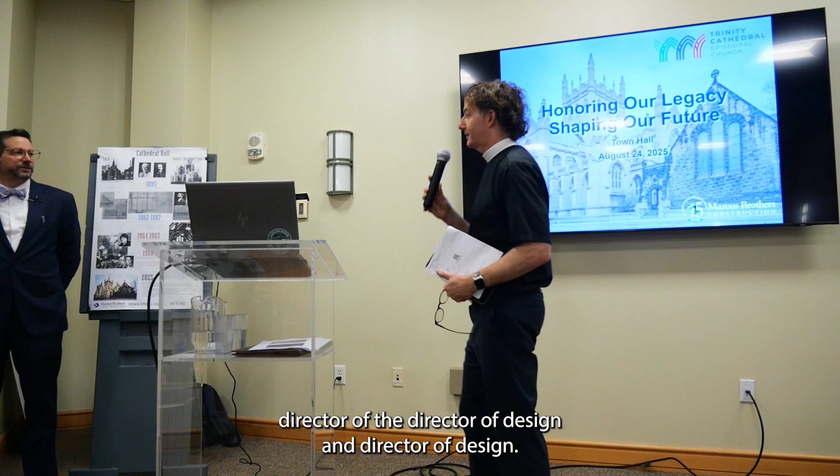We are pleased to welcome back Carter Edman, who is the Director of Design. I'm like, okay, Director of Design. This is right after church, so of course my IQ drops by about 20 points while I wait for it to come back. And Doug Giebel is an architect, and Stacey Trsek.

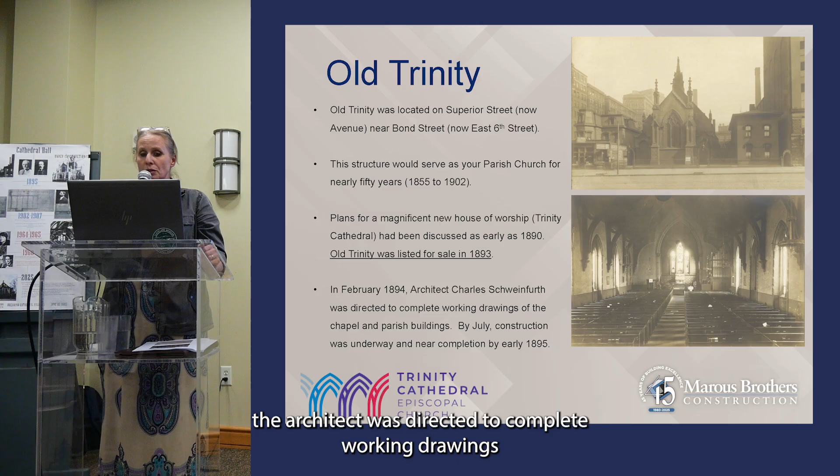In 1894, the architect was directed to complete working drawings for the chapel and parish buildings that are on this campus. By July of the next year, those buildings were built. You still had Old Trinity, so you had an uptown and a downtown place of worship at that time. Old Trinity was also put on the market in 1893, and it would stay on the market for 9 years before it sold.

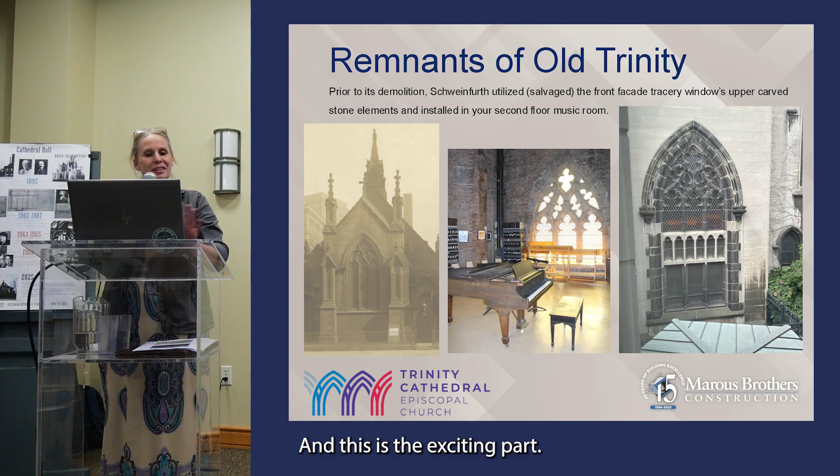You still see remnants of Old Trinity in your music room upstairs, in the tracery window - that's the stonework. And this is the exciting part: the windows in Cathedral Hall, I took a photo off your walls, got permission, scanned it at high resolution, and determined it's the exact stained glass that was in Old Trinity. It was made in Munich, and there's even information about the donors who were members of the parish.

So you sold Old Trinity, or knew it was for sale, and Schweinfurth needed to do an addition because the parish house and chapel weren't built to accommodate services, but they needed to be, because you had no home for 5 years until your cathedral would be finished. So Schweinfurth designed an extension, which he called the Perry Street Chapel, since East 22nd was Perry Street at the time. This architectural investigation also helps our design and construction team understand how things were built, when they changed, and how they correlate to the overall plan.

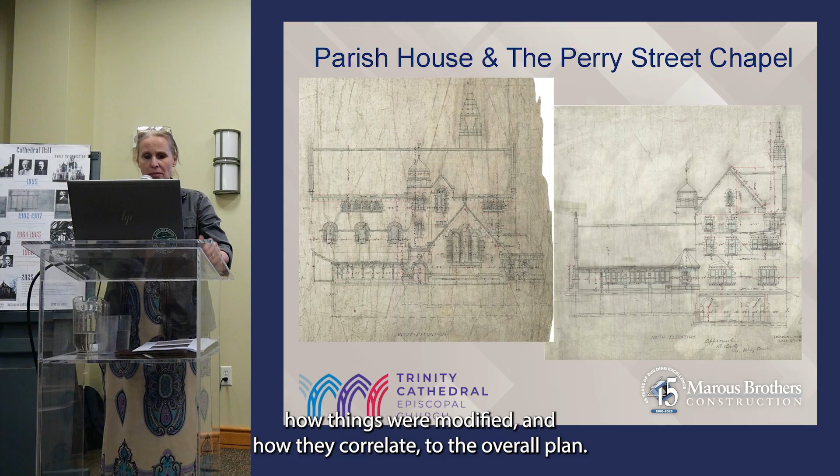Here are some elevations done by Schweinfurth. The cloister - these were the partition walls that would have folded back. This is looking towards Parish House from Cathedral Hall, where you've got the door in the middle now that backs up to your kitchen. It used to have 5-panel doors that would bifold and fold back into pockets on either side.

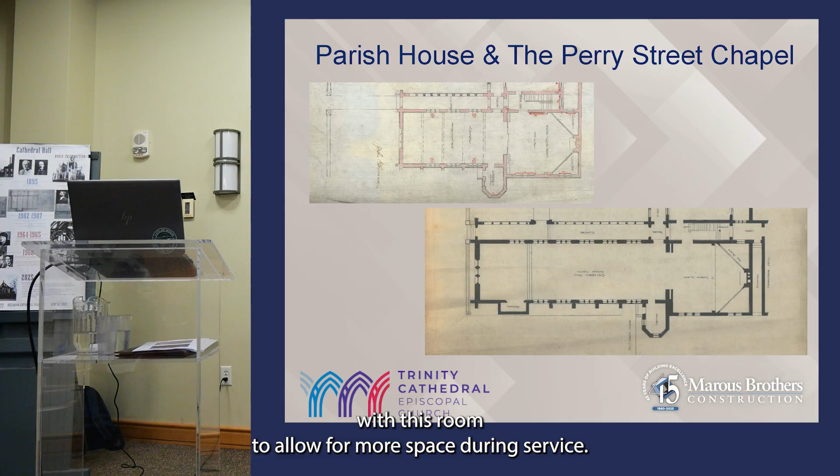That was your original chapel. That is what it now looks like after the addition. You can see how substantially large it got, and how those doors would have communicated with this room to allow more space during service.

Your cloister also extended. The windows in the chapel were very plain - not the diamond pattern windows you see today. And there was no door to the garden in the original chapel, not until the 60s.

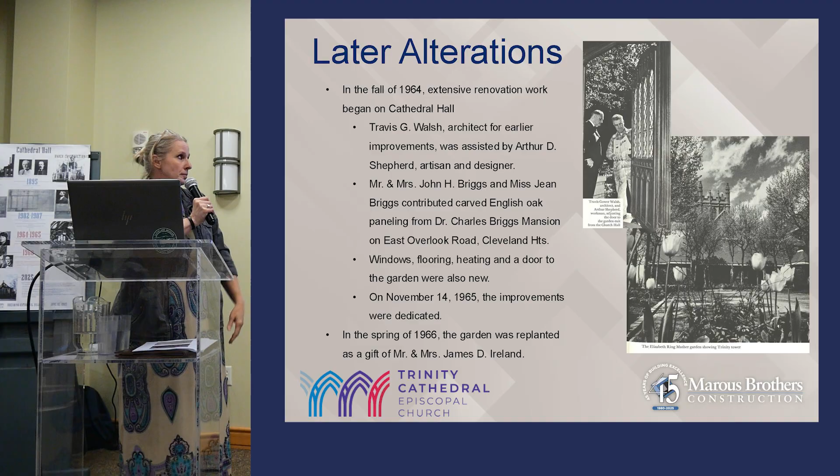That's when a different architect was involved, Travis Gowan Walsh, who was also a parish member at Trinity. He worked with the Briggs family, also parish members, who donated paneling and doors from the Briggs Mansion - a Schweinfurth-designed home in Cleveland Heights - to the cathedral, for Cathedral Hall. He also did the windows you see today, the diamond pattern with interesting color pieces mixed in - that's Travis Gowan's work.

So we're trying to understand the different layers of the renovation. We also had the Elizabeth Ring Mather garden improvements, done at that time by her son and his wife in her memory.

When the chapel was first built, it was actually used by Grace Parish while their church was being renovated. Then, coincidentally, after your cathedral was completed, the pews and altar were donated from Cathedral Hall to Grace Church for their use.

During the Depression years, starting in 1932, you had a program that really speaks to your service to the community. People couldn't afford entertainment or any kind of extra fun, so Trinity came up with a program that was very popular - 300 people initially came, on Fridays and Sundays. It was entertainment-focused, starting with singing, and you had a strategic partnership with the Cleveland Orchestra for musical performances.

You had a strategic partnership with the Cleveland Museum of Art, who did art exhibitions, and with the Cleveland Institute of Art, who did still drawing classes. You also partnered with over 50 grocers, florists, and restaurants in the area so people had food - they would leave with flowers, food, and sometimes even toys.

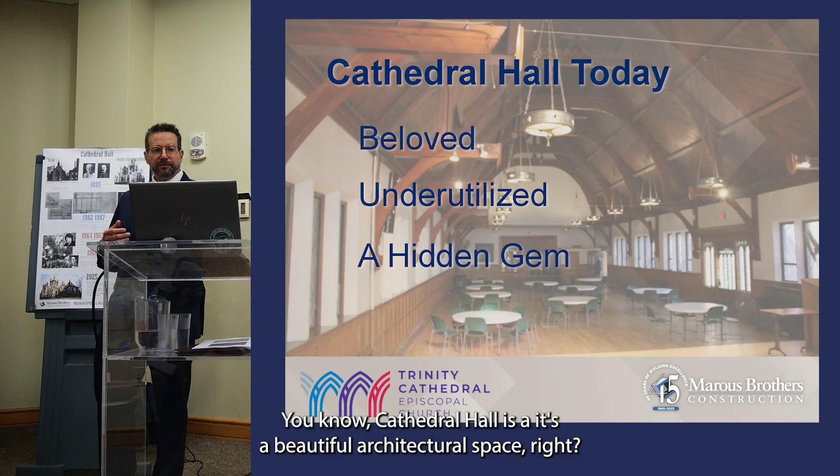And I want to talk about Cathedral Hall today, where it's at, what its potential is, what the limitations are. Cathedral Hall is a beautiful architectural space. You don't get spaces like that very often, and it's a beloved space. It is also very much underutilized, and I would consider it a hidden gem. Even when you're here on campus, it's kind of hidden from where we are now. Tremendous potential, also a lot of challenges.

I'm sure you could rattle these off yourself, but probably primary among those challenges is the lack of adequate climate control, so that's paramount to be addressed. Access and wayfinding - how do you get there? If you're driving, walking, taking the bus, or already here, how do you get over there? There's a lack of connection to the rest of the campus, and a need for flexibility of that space for different uses.

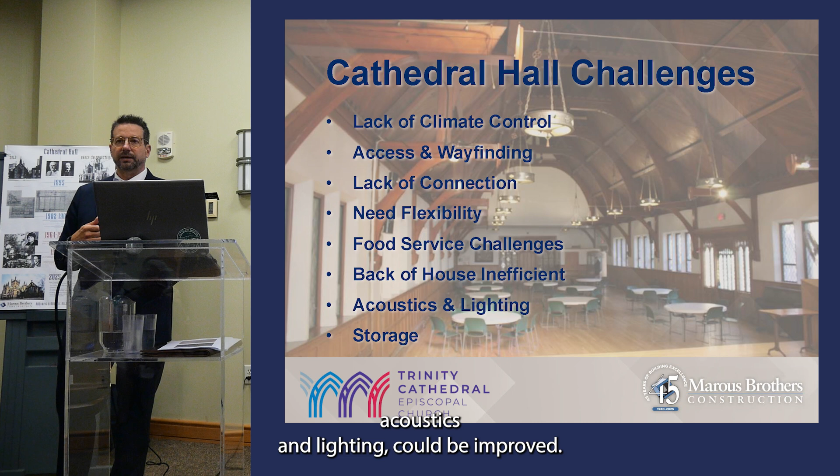There are some food service challenges, which we can talk about. The back of house space - and just for reference, when I talk about the back of house space, I'm talking about the area to the east of Cathedral Hall where the kitchen and parish house are. Acoustics and lighting could be improved. Storage needs, particularly table and chair storage.

I'm not going to get into a super amount of detail on all of these things because I want to make sure we have plenty of time for questions and answers. So if there's anything you want more detail about, ask during Q&A or come up afterwards, because we do have a lot to share.

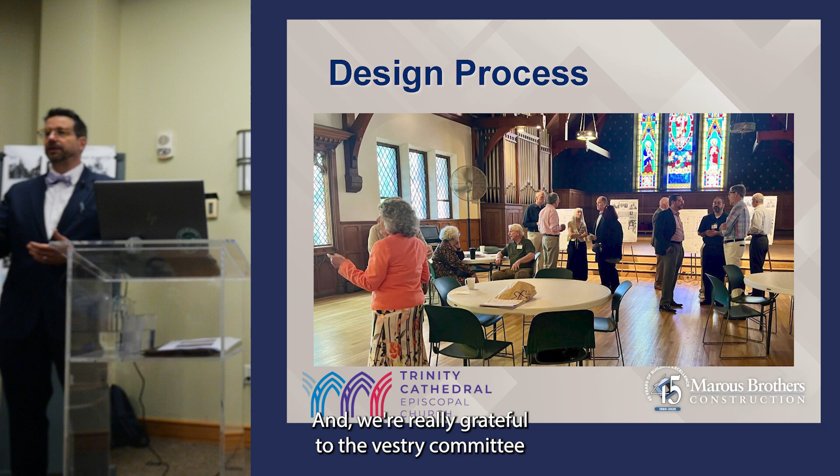So this is the first picture from the first town hall we did, and I want to talk a little bit about our process. This was a very collaborative process and will continue to be collaborative, and we're really grateful to the vestry committee and to all the people we worked with and talked to.

We talked to kitchen users, we talked to music users. We got a lot of feedback through the vestry committee, so that's what really has shaped all this. And again, we would continue to want to do that. This needs to be a project, a space that's about the community that uses it.

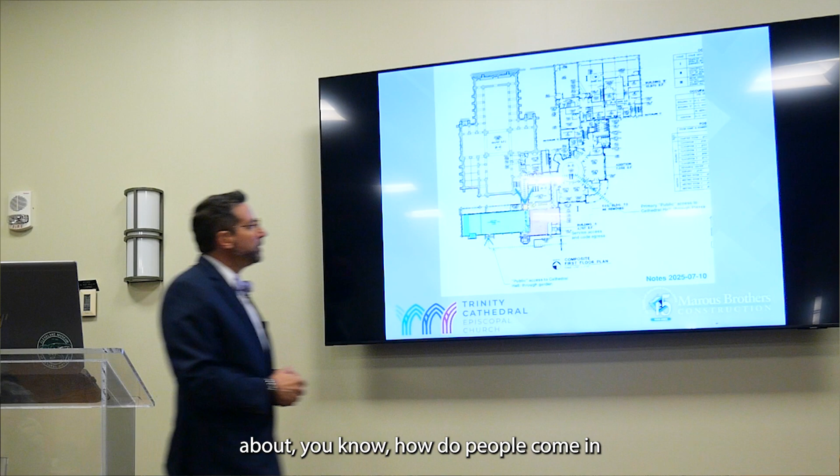We did a lot of analysis, study, and investigation. I borrowed this diagram from Dave Miano, who did this, just really thinking about how people come into the piazza and the campus as a whole. This is a very strong orienting element that helps you know where you are, but to get from here to here is not clear, and there's not really an inviting way to do that.

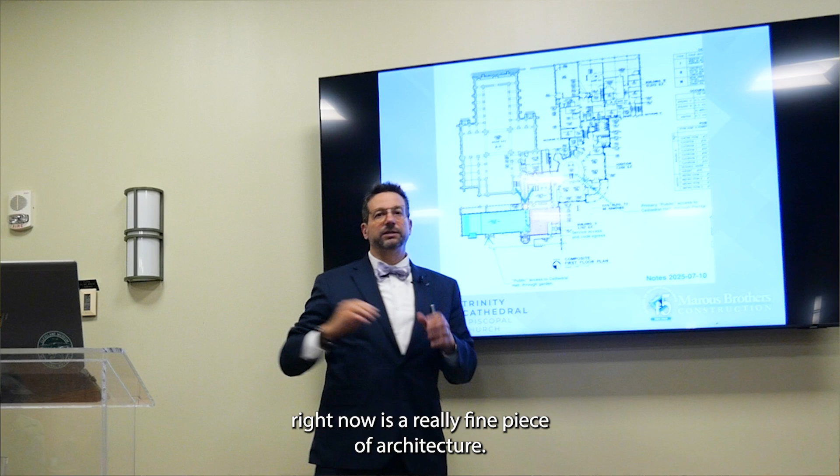People come in through here, materials come in through here. There's a couple of different corridors that can get you to Cathedral Hall. There's this existing back stair, which really feels like a back of house space - could be a circulation space with some architectural intervention. There's the cloister here, which right now is a really fine piece of architecture, beautiful stone, timber framing, but not very inviting, sort of dark and low.

If you were here, you wouldn't necessarily choose to go down there and see what's down there. I'm just sharing a few of dozens of iterations of playing with different types of circulation and how we could maybe add circulation in different ways. Some of these ended up with a lot of circulation in that version, kind of redundant, but just things that we explored. Which leads us to where we are now, which is schematic design.

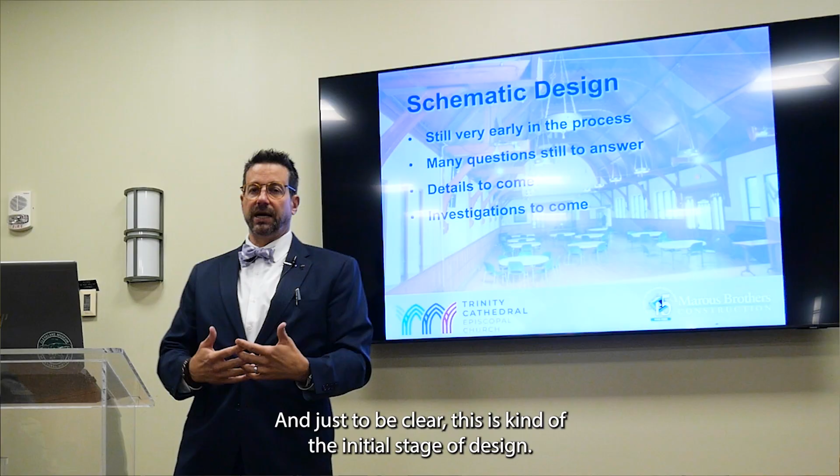Just to be clear, this is at the initial stage of design, so we're going to see ideas here. It doesn't mean that's exactly what things will look like in the end. There's still more investigation to do - we need to work out details, and details sometimes inform larger design decisions. We're going to need to see what's behind some of the walls and so forth. So still a lot of design yet to do, but we have, I think, a pretty solid direction here.

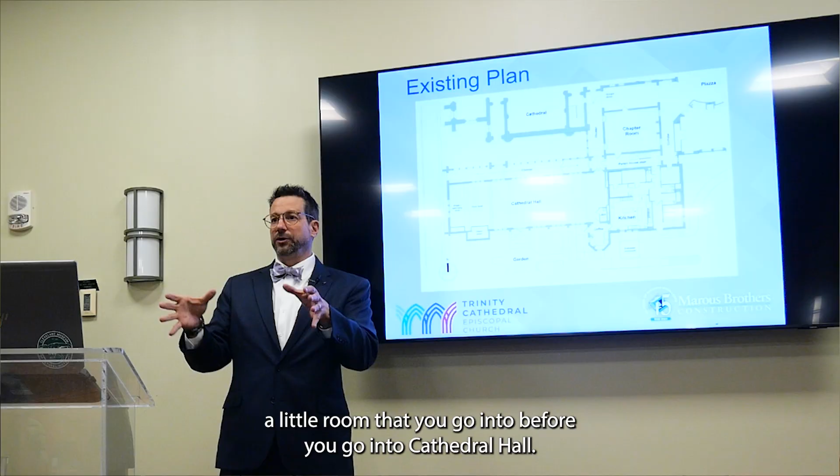So I think everybody's familiar with Cathedral Hall and these spaces, but just to orient you, here's Cathedral Hall. Those lovely stained glass windows are at this end. This is where the organ was, with the pipes and the pipe chase. This is the coffee service area off of Cathedral Hall, which we'll spend a little time talking about. The kitchen, the east cloister, and this is the little bell tower vestibule, the bottom of the bell tower, the little room you go into before entering Cathedral Hall.

A lot of that analysis we did, spending time walking through and being around the space, made us realize that little vestibule is really the nexus, the crossroads to get to Cathedral Hall, and it needs to be developed and celebrated and made into something inviting that makes you want to come down here and go to Cathedral Hall.

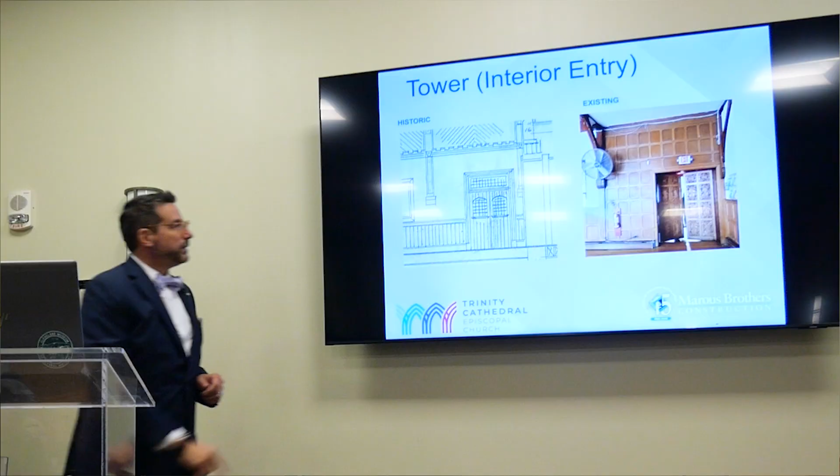This is looking at that entry from the south, so if we're standing here looking at that door. This is the door as it is now. This is the original design.

Sharon talked about the doors and paneling that came from the Briggs Mansion. This is one of those doors that came from the Briggs Mansion, so it's not the original door. This was the original design, and you still have these two windows from the doors—they're in the basement—and then there was a glass transom above.

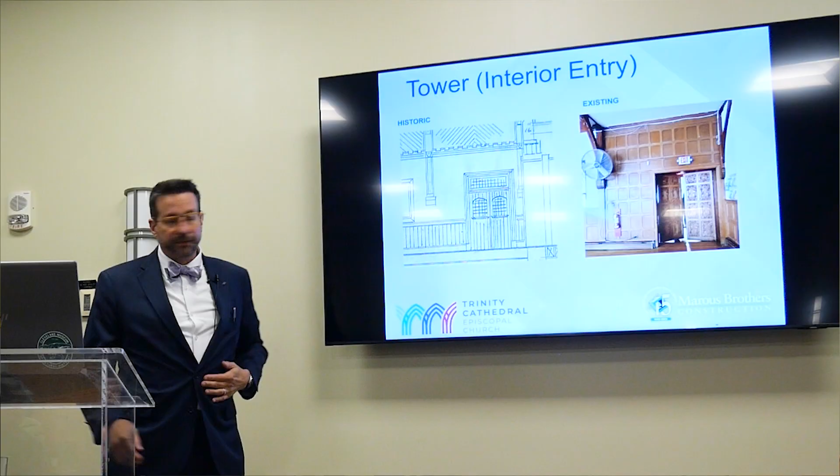We would like to see something like this come back, where you can actually see through the door, looking into Cathedral Hall instead of having a blank, dark door as you approach. Not that those aren't lovely doors, and just to be clear, anything removed would be preserved—we're not talking about throwing anything away. But that door is one of the real challenges to getting to Cathedral Hall.

Another architectural challenge is this bathroom box, which was a necessary part of the work done here 20 years ago, but it creates this big blank presence. How do we deal with that? We know it's not going to go away.

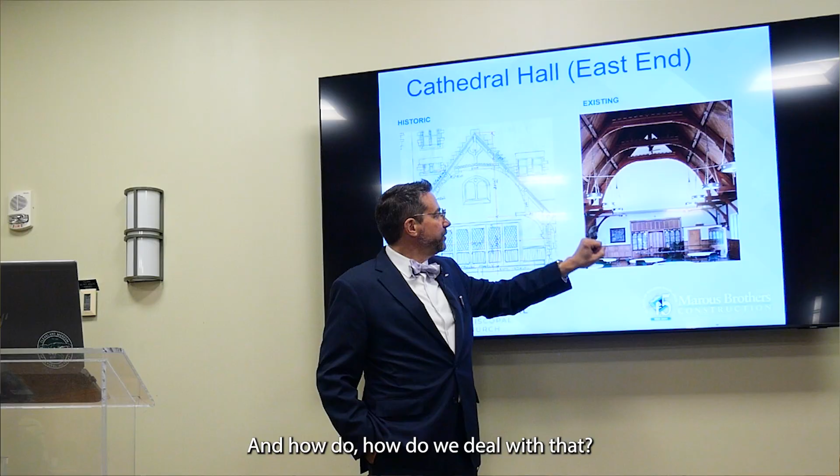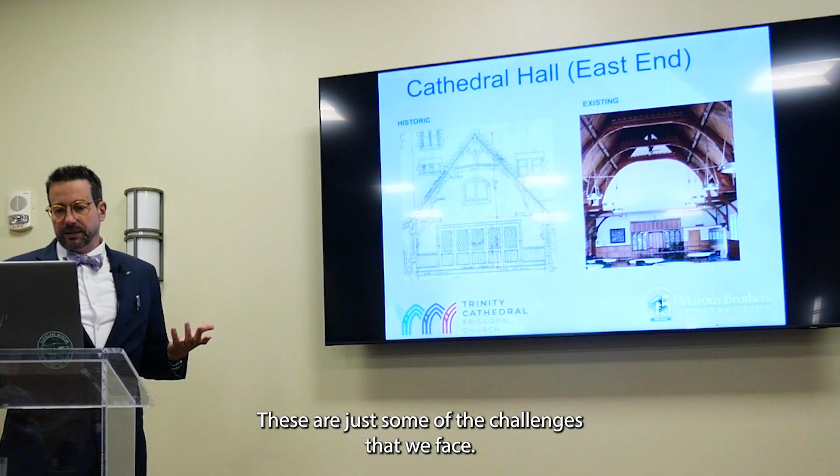This is another elevation that Sharon found, showing those original bifold doors she talked about. This is obviously the door to the kitchen—well, it's not actually the door to the kitchen, it's a false door because there's a concrete block wall behind it. But this is also from the Briggs Mansion. And then this was a window that was up higher on the wall beyond this originally. So how do we deal with that, and how do we maybe integrate it better into the rest of the architecture? These are just some of the challenges we face, and this research helps us figure out how to answer them.

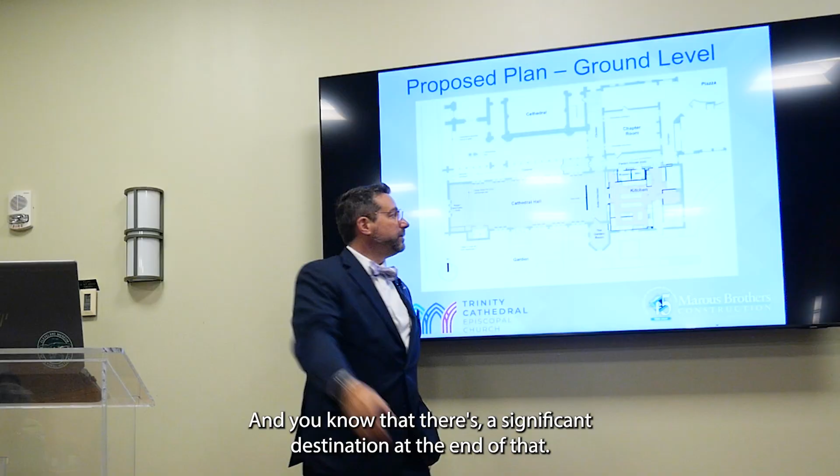So this is the schematic plan we're proposing at this point, and I want to walk through it, then zoom in to some parts to see how it works. We'd like to really develop this cloister hallway, being sensitive to the quality of the architecture that's there and the memory of what was originally there. We want it so that if you're standing here and look down there, that's an inviting path to take, and you know there's a significant destination at the end of it.

So we're talking about a few new finishes, some improvements to the windows, and lighting especially there. Some of those finishes may continue into this stair. With new finishes, lighting, and other sensitive interventions, but not a lot of architectural changes, this stair could become a much more usable public stair.

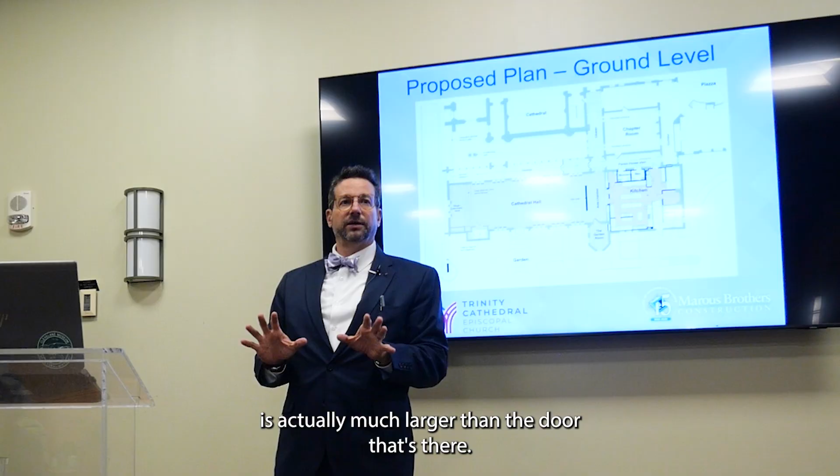One thing that's interesting is there are doors at either end of this stair. This door opening is actually much larger than the door that's there now—we'd like to restore that full opening. You found there was a transom window there too, which you still have. You've done a great job preserving a lot of your architectural artifacts. So if these could be larger, glassy doors with good lighting and nicer finishes, this might be a really logical, inviting place.

Where do those stairs go? When you go up the stairs, where do they go? So they go to the offices and classrooms above here.

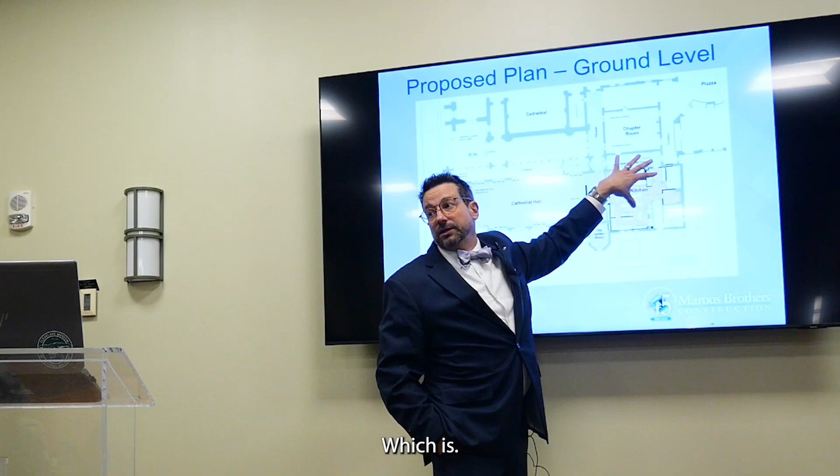The children's programs are upstairs, and then the highest level has apartments. They used to have apartments for different people through the years. Sorry, is the apartment where the children's spaces are now? That was once an apartment. Oh, it's higher. Okay.

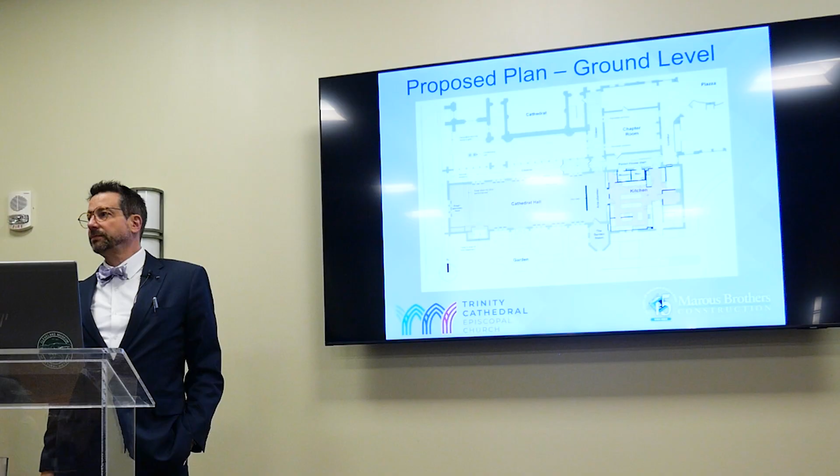Okay, I didn't realize. One of your rectors did for a while, but his wife passed away, so the church decided he should live here. We're recording this, so when you make a comment, can you...

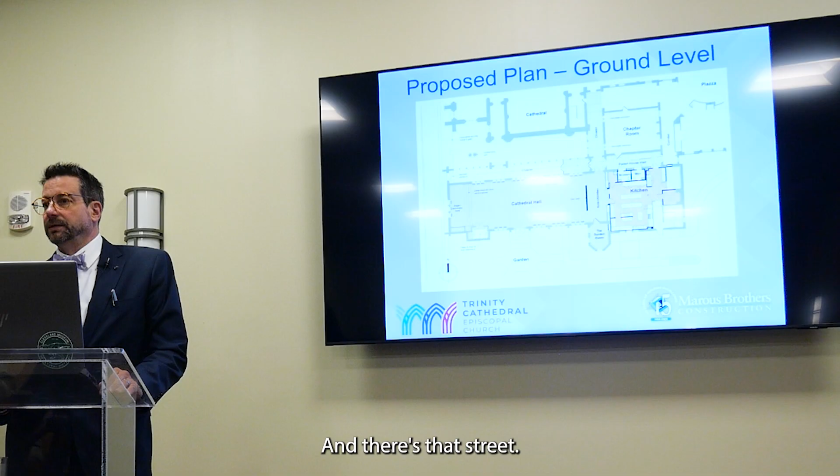It's the youth space where the apartments used to be, in the Sunday school area. There's an attic above that, where some of the HVAC is right now, and a bathroom that has a string to ring the bell, and the tower. It goes down to the basement, which is largely unfinished. There's a boiler room, a full open basement, and there used to be some restrooms and a little classroom called the Tango Room down there.

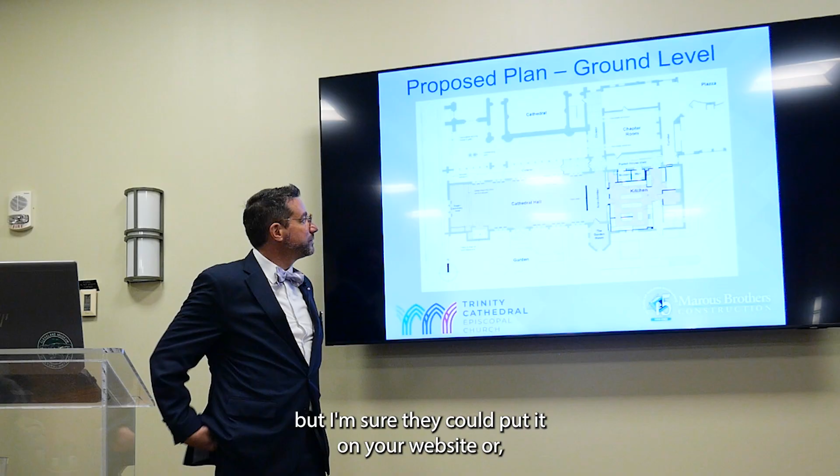We found a rendering that shows just Carriage House and Cathedral Hall. I've shared it with the vestry, and I'm sure they could put it on your website or share it with the congregation. It shows the buildings as they existed independently before the cathedral was constructed. It's fascinating to see the open cloisters, to understand the architecture ahead of all the other buildings on campus. Mather Hall was built after that.

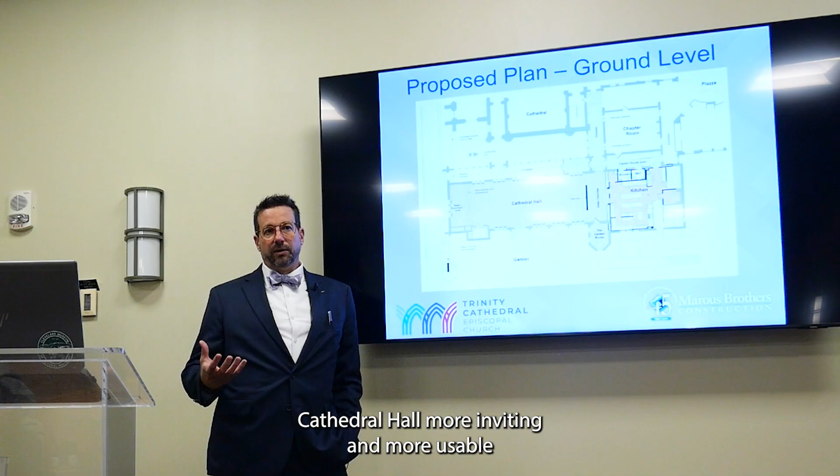We're thinking a lot about the approach and how you enter Cathedral Hall. One of the big takeaways from all of this investigation was that making Cathedral Hall more inviting and more usable isn't so much about transforming Cathedral Hall itself. It's all the stuff around it - the back of house spaces, the corridors. There are improvements to do in lighting and a couple of things like that, but it really just needs a light touch. What really is more important is all the things around it.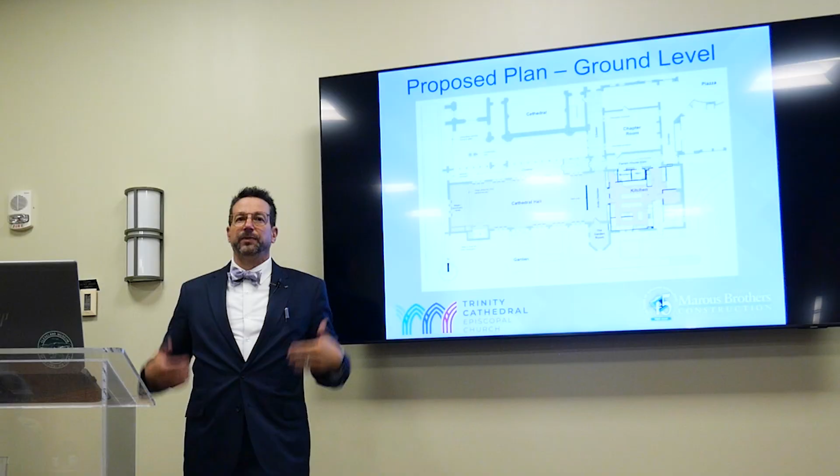This is under, from this line here, that's under that bathroom box. That gives us an architectural opportunity to create an antechamber, or sometimes we've been calling it a narthex, a pre-function space. So you go in here, maybe gathering, chit-chatting before you go into the main space. This could also be a space for food service - we'll look a bit more at the kitchen. There's some flexibility there. This, which is currently the coffee service, we'd like to relocate to a more central location in the kitchen and transform that space.

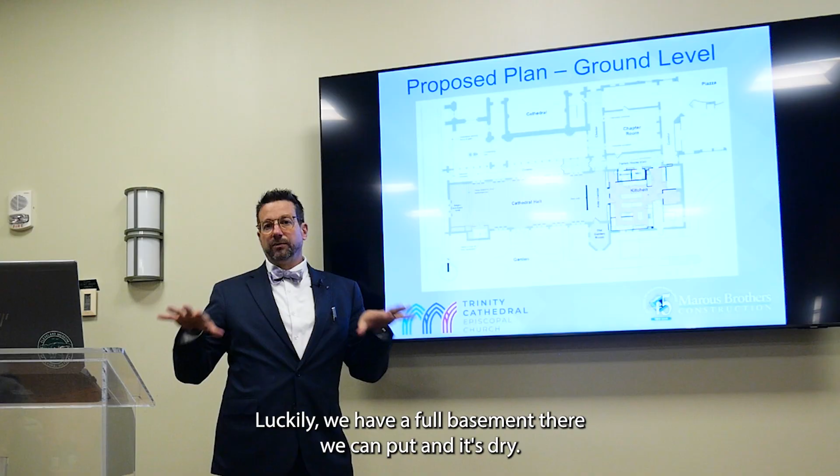In the main Cathedral Hall, the biggest, most important thing we're probably doing is adding the appropriate HVAC. Luckily, we have a full basement there, and it's dry, so we can put an air handling unit there to serve it with air conditioning and heat throughout the hall from underneath, so we don't need to go overhead. That's something you won't really see, but it will obviously make a big difference in comfort and usability.

We talked a little bit about storage. We have an opportunity here where that organ encasement is to put a lift, so the tables and chairs can easily be brought to the lift and stored underneath. We don't need to have tables and chairs stored in much more highly valuable public spaces on the first floor.

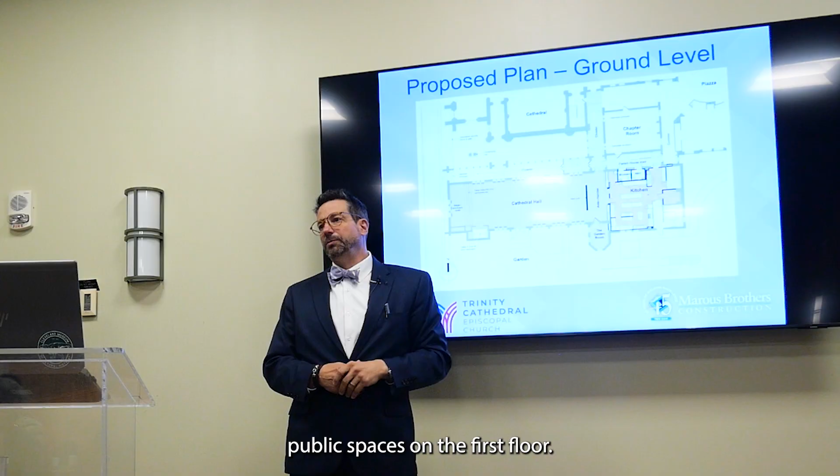A little bit of a change to the stage area right now - there's sort of a two-level stage, a couple steps up and a big stage, then it steps up further. We're removing the lower stage so there's more floor space, keeping the upper stage so you could have lectures, musical performances, services, weddings, whatever. But we're adding some larger riser steps there, so you could have a choir or something standing on those risers. Some lighting improvements too, but a pretty light touch in there.

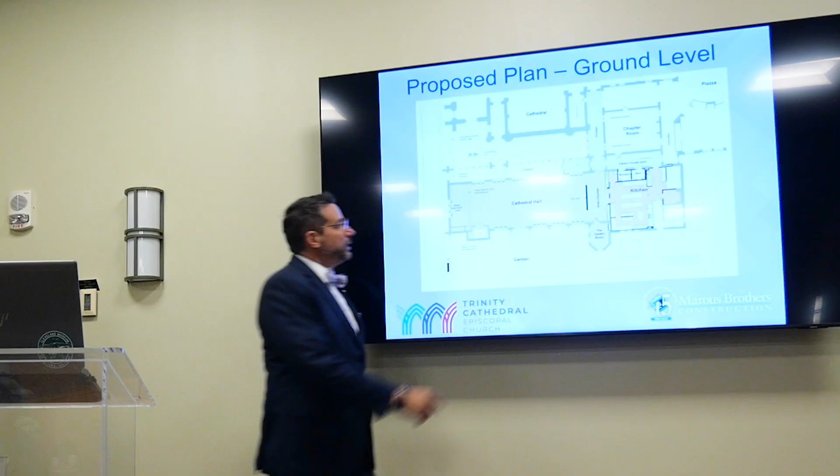Now, to create this antechamber or pre-function space, we're talking about putting a wall in there. We're going to take a look at what that will look like, because obviously that's important.

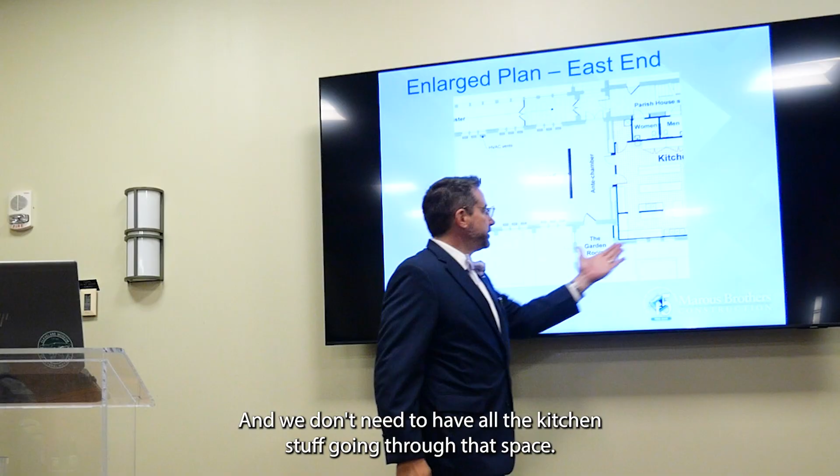I do want to talk about this garden room a little bit. This is a really potentially lovely little room. It serves an important function, which is coffee, and coffee is important to every church. But we can put that in another space that's a little more functional, and we don't need to have all the kitchen stuff going through that space. This was originally the dean's office - it was a little library. This could be a great sitting room with views out to the garden. We can imagine some nicer finishes, more comfortable lighting, and seating in there. It could be for consultations, or if there's a wedding reception, it could be the bride's room, or musicians getting ready there. Just a lovely little contemplative space.

So let's take a view. The next slide is going to be a view out here looking back at the east end with that new wall. The top half of this is the bathroom box, so we're completing that wall. We'd like to replicate the historic window that was up higher and farther back that Sharon had found.

Continue the wainscot paneling and integrate this into these hammer beam arches so that it really feels like it belongs. One thing not really shown here—acoustics is a concern. We did a deep dive on that, and we imagine there might be some sound-absorbing material on the upper portion of this.

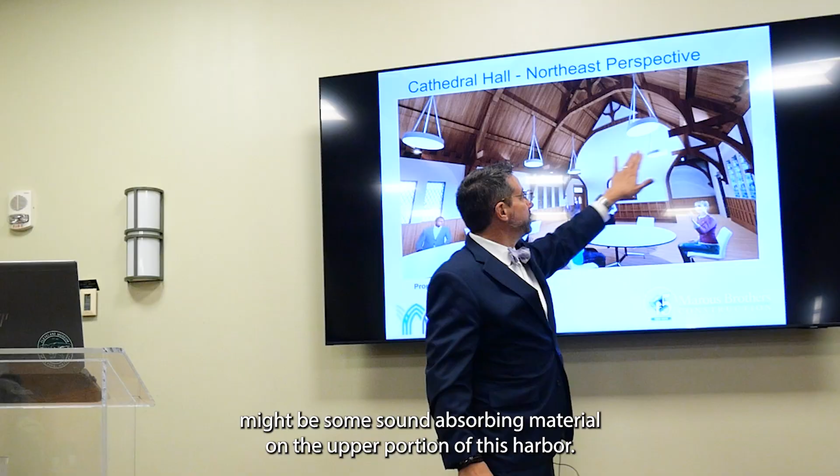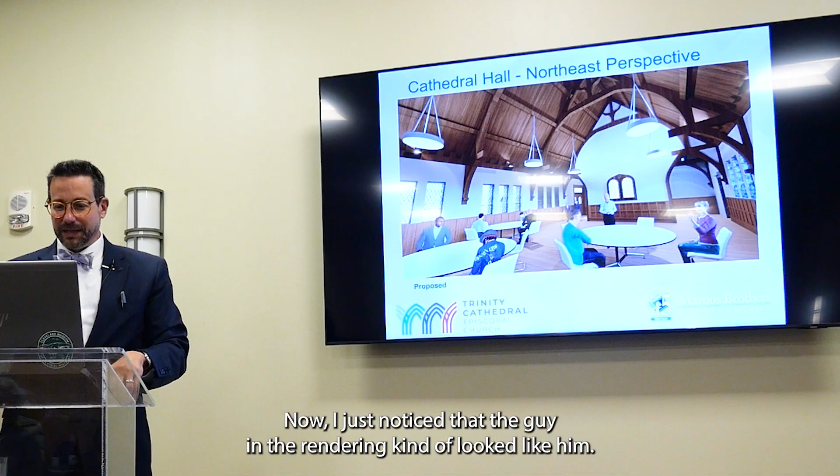So that's kind of the idea there, and you can also kind of see sneaking through there some idea of replicating—though it may not be exactly literal—the notion of those doors that had window lights in them that you see the light through.

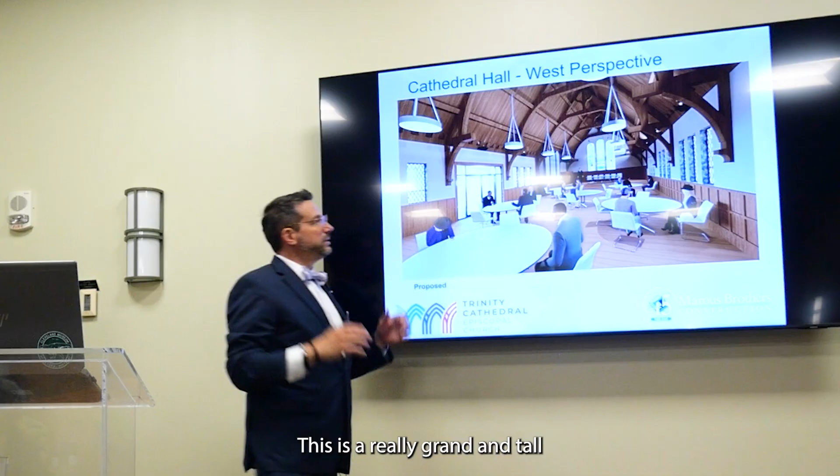Looking the other way, the west end, not too much really changes architecturally. One of the main differences would be some uplighting here. This is a really grand, tall, and capacious space, but it doesn't quite feel that way. It feels kind of heavy, and I think a big part of that is because it's just dark up there, and you can't see all the articulation of those beautiful trusses.

So we'd like to illuminate the planes of the roof, make that feel a little lighter, and the trusses would be a bit more in relief. That would be a nice augmentation.

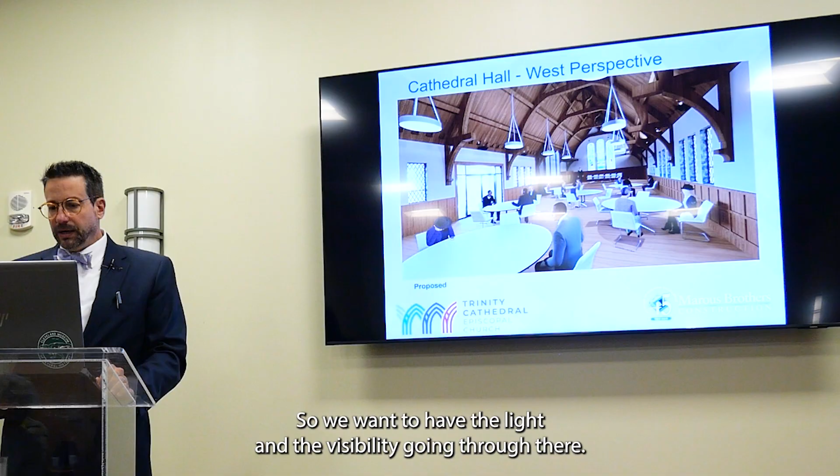One thing we'll get to here in a minute—we're showing a very glassy door there. We don't know if that's exactly what it would end up being; that's obviously a very specific choice. Part of that is we want to increase the connection to the garden, so we want to have the light and visibility going through there. We'll talk more about that in a minute.

We were asked to look at some different seating layouts. So with round tables of 6, you could easily have 132 for some event with food.

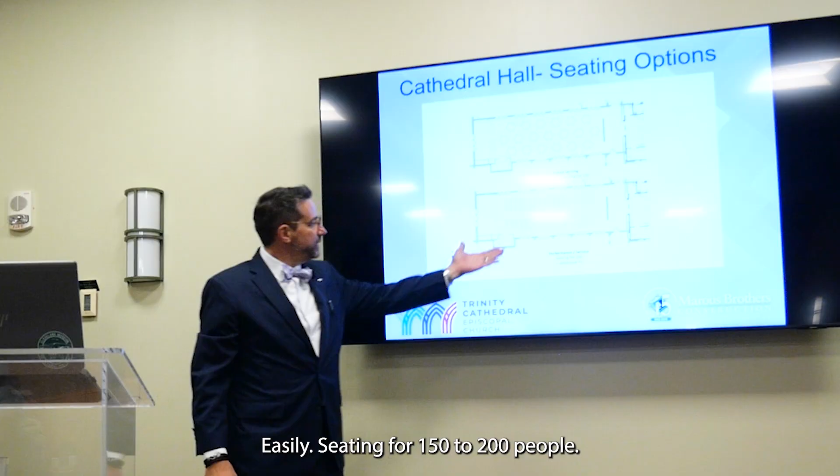Food service here could be done in a couple different ways. If there are waiters or servers, they could come in and pick up food out here. You could also move these serving tables out into the narthex or even into the main area. If you had Apollo's Fire or some performance here, easily seating for 150 to 200 people.

A Place at the Table—about 66 people seems to be about what they need. Again, we could bring the serving out here, and people could self-serve at the buffet. Or another buffet option might be to have it in the middle, which might be nice for a wedding reception or something like that.

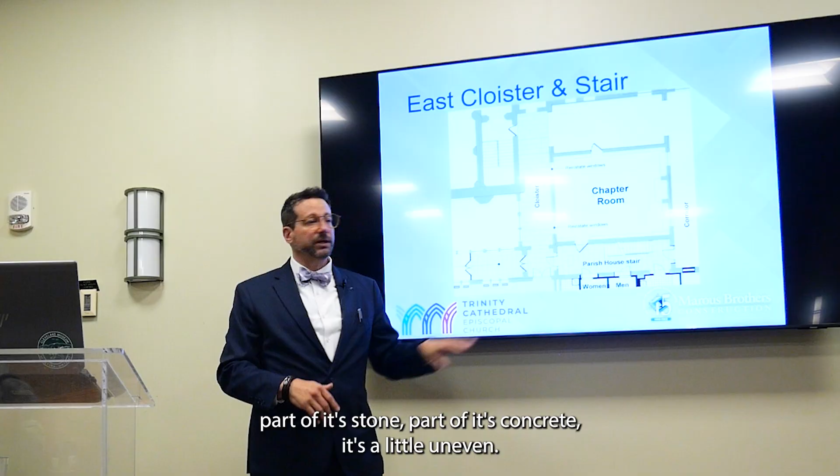So let's take a closer look at this cloister hallway, which we'd like to make more inviting. One thing—the floor in there is part stone, part concrete, and it's a little uneven. We're envisioning a nicer finished floor, maybe a porcelain tile, something compatible with the rest of the architecture.

This arcade here was originally open—it was open air, an exterior space. We don't want to do that because we want interior circulation. But those white wood-framed infill windows, which are not original and not historically compatible with the rest of the architecture, we'd remove and replace with something much more glassy and thermally efficient, so you really feel connected to the outside.

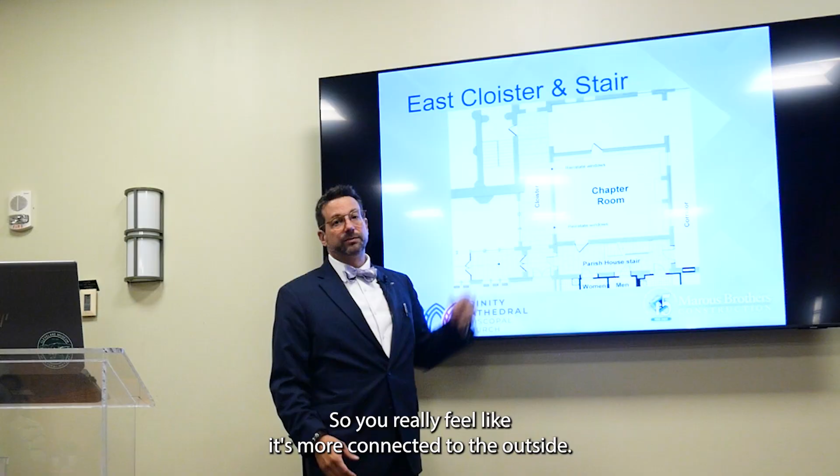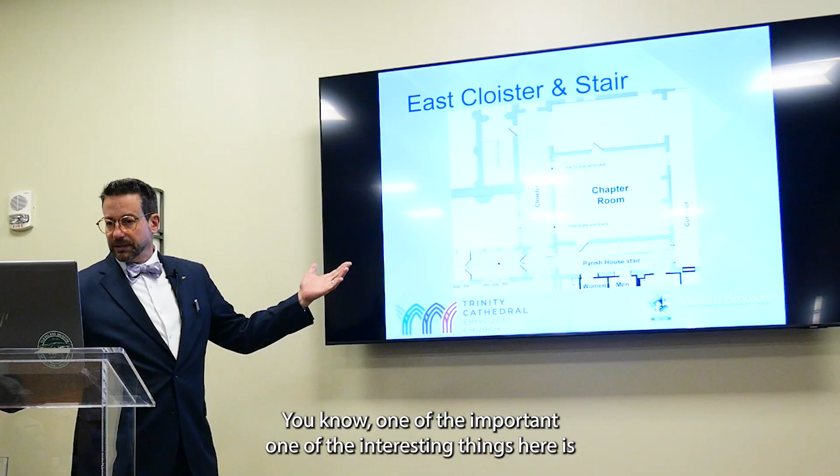So we want to make sure that destination, that little vestibule, is well illuminated. We imagine some sort of feature pendant light there, maybe historic, some uplighting, get light on this wall, get light up here, some little pendants. Restore those windows that Sharon mentioned into the chapter room. We really want that chapter room to be a little bit more prominent, so that it's known that it's there. That would be an initial idea of an approach to that hallway to really welcome you down it.

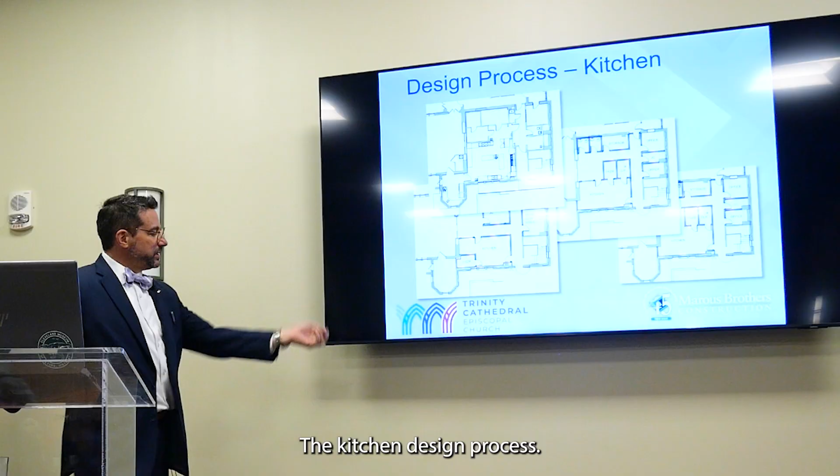The kitchen design process, we went through a lot of iterations on this. We talked to kitchen users about how much kitchen service is really needed and warranted. Is it just a warming kitchen where caterers bring stuff in? We considered that. We don't think that's the right solution.

Actually making food there, we think will continue to be a part of how it operates. You have the vent hood over the stove already. That's one of the biggest hurdles to creating a commercial kitchen, so we want to take advantage of that.

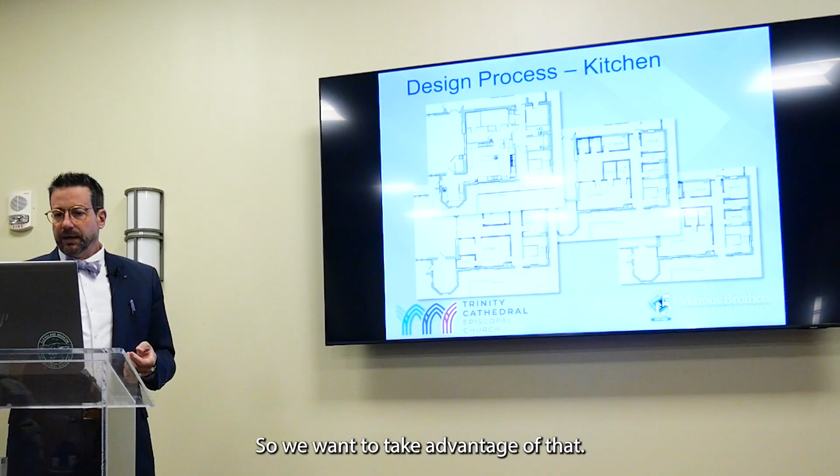We worked with a kitchen expert on this, and we would continue to bring a kitchen expert on as part of the continuing design process. I'm not going to go through all the functionality of the sequence of operations here. We have considered that, and I'd be happy to discuss it afterwards.

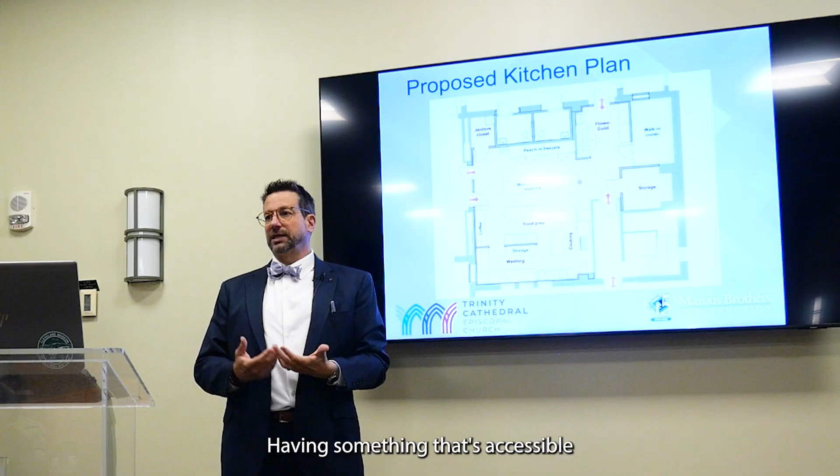We clarified the circulation through here, which right now is a little bit of a labyrinth. We added two ADA accessible bathrooms, which I think is really important. When you have functions here with a lot of people, good restrooms aren't close—they're over here. Having something accessible and close for those patrons is really important. If we turn this stair into more of a front-of-house public thoroughfare, it'll be more obvious where they are.

Flower Guild has their own area, so you don't need to put flowers in with the food. We could talk about—if you have foxglove or something poisonous, you might not want to put it with the food. Lily of the Valley would not be good.

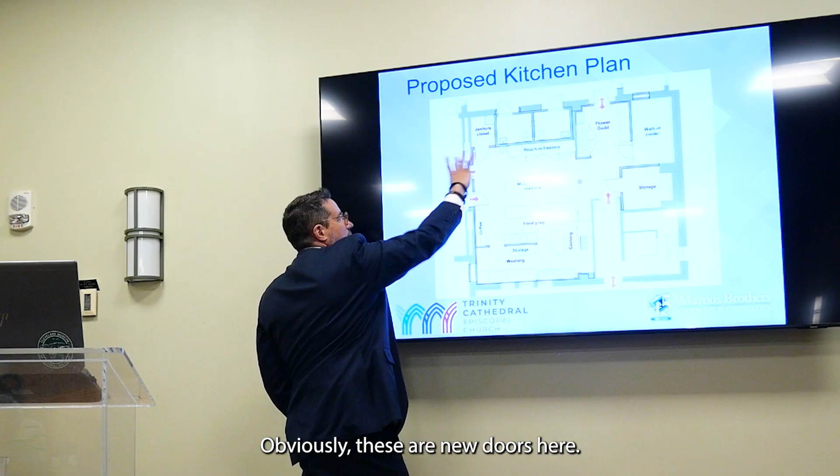But different options in terms of food service in and out. Obviously these are new doors here. We would be removing a portion of that concrete block wall so that we could have that.

And I mentioned the connectivity to the garden, right? I think that's really important, and I think everybody felt that. This was a little bit beyond the initial assignment, but we really felt we had to look at it—it's extra credit. We can't just look at this in isolation, because that's the whole crux of the problem. It feels like it's in isolation now, and we want to solve that.

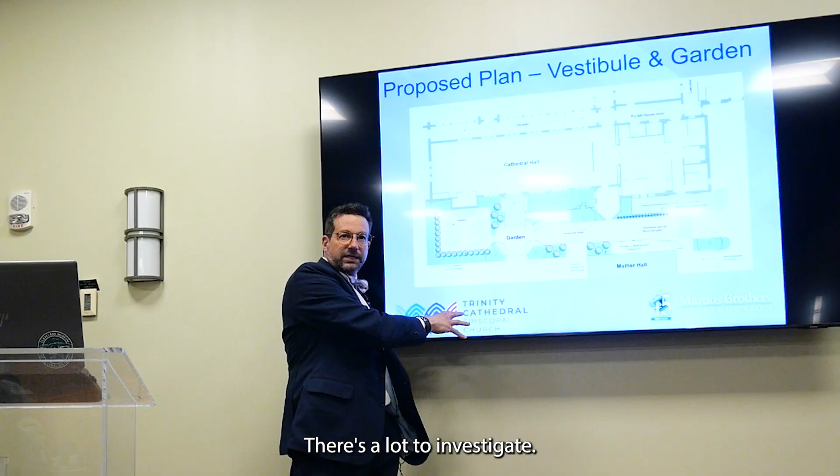So we actually spent some time looking at different things at the cloister garden, and we looked at the whole Mather garden—what could that be? I think there's a lot of potential there, a lot to investigate. This whole garden could really be almost more like a park.

And I recognize there are security concerns and a lot of other things that have to go into that. If that part were to move forward at some point, we would bring in a landscape architect with urban park experience and do that appropriately. But there's a real opportunity right in front of us here.

If you're at the parking lot right now and you get out of your car, you look around, there's no way you would think about going down there. All there is is a dumpster and a ramp and a rickety fire escape.

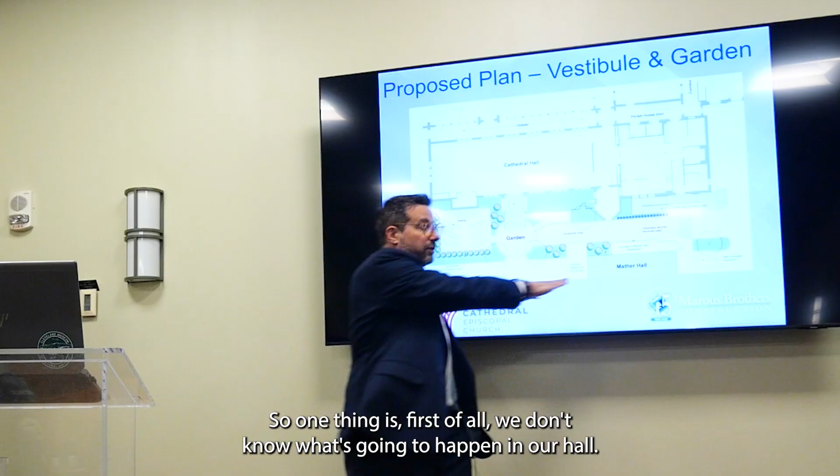We don't know what's going to happen to Mather Hall—that's a whole big question, and it's very important, but not part of this study right now. Whatever happens to Mather Hall, that fire escape has to go. It's never going to be a fire escape again—it's intrinsically unsafe and doesn't meet code, and we don't want people going on a fire escape. So let's get rid of it.

The dumpster needs to be somewhere, but why does it need to be right there? It should be near the kitchen, obviously, and we should talk to your dumpster service people. We're suggesting it might be worth losing a parking space for that. We'll see—that's not quite solved, but there's an opportunity there.

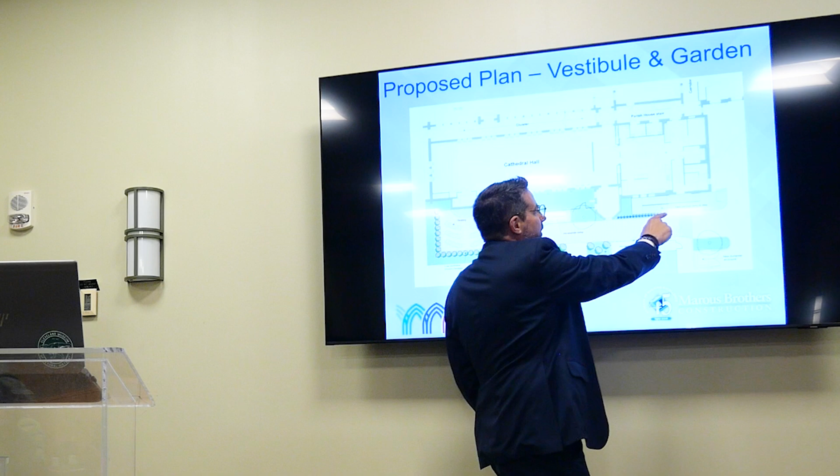And this ramp should be reconfigured to be more usable. I understand sometimes food comes in all the way around here because this isn't very convenient.

If we can do that, we can open this up and turn this from a barrier into a portal into the campus, right? You can imagine an event here after hours, a standalone event, and everyone comes down here to the garden into a new vestibule.

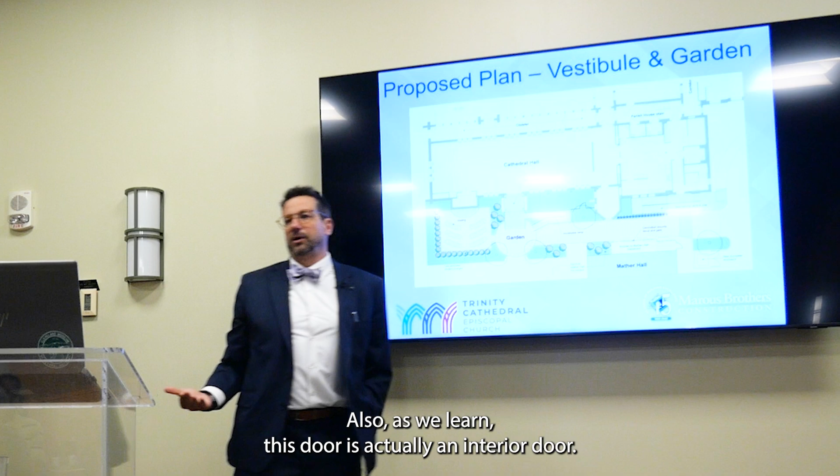If you're going to use this door, you really need to have a vestibule there for weather control. Also, as we learned, this door is actually an interior door, and that's one of the reasons it's not holding up very well. You can keep maintaining that at great expense, but it'll never keep the cold out. So let's put a modern but well-performing door here, with a little vestibule.

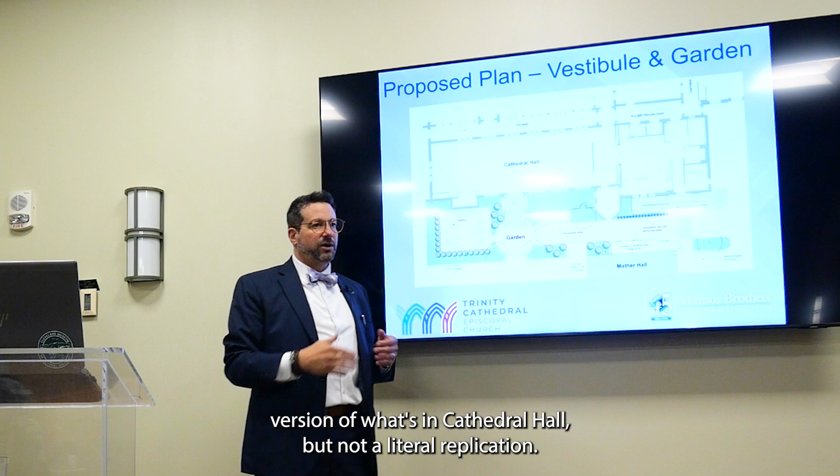We're imagining, adding something onto something like Cathedral Hall is a sensitive thing. We're imagining something that's very minimal, very glassy, you see through it. Maybe it has large dimension wood framing, sort of a mini version of what's in Cathedral Hall, but not a literal replication. We'll take a look at that in a second.

And there's a gathering space when you come out and come down, right? So it receives you. You can imagine another place before or after an event where people are mingling about and talking. And then this space just to the west, this is where that bump out is for the organ. It really wants to be something, right?

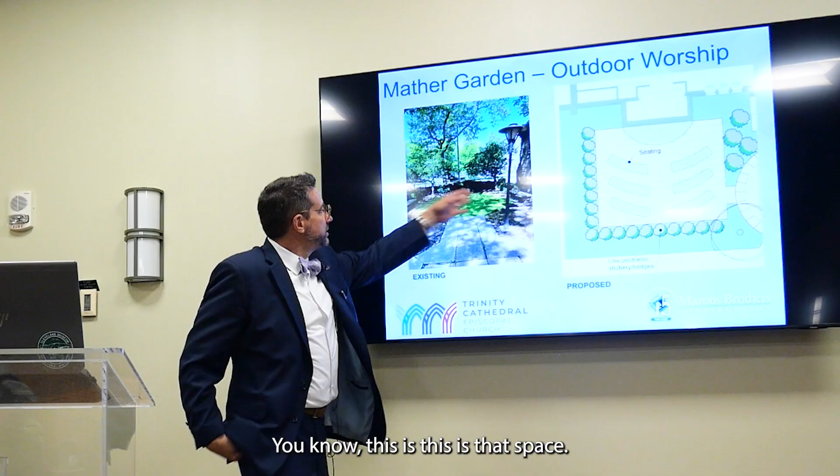It's just begging to be developed as a space. We're showing some seating that maybe you could have worship there or something. Maybe it's seating like that, maybe it's something else, but it really wants to be an outdoor space. Here, this is that space. And there's a couple benches there, which maybe that's the kernel of an idea, just a nice grassy sitting area, but needs some development and could be another special place on campus.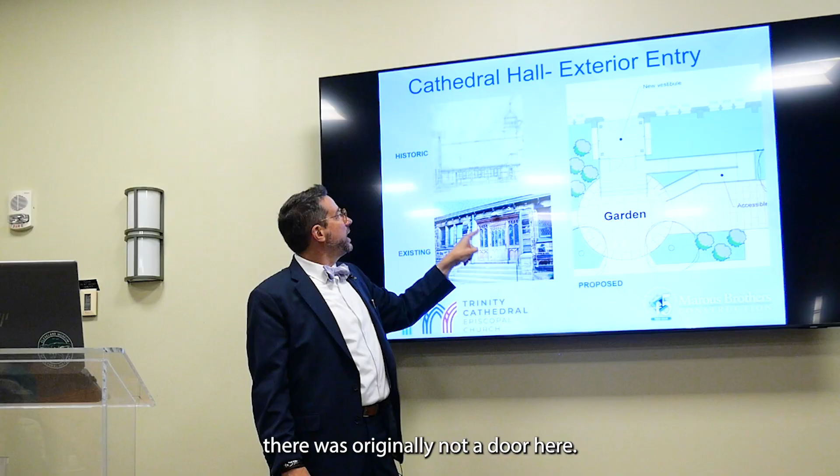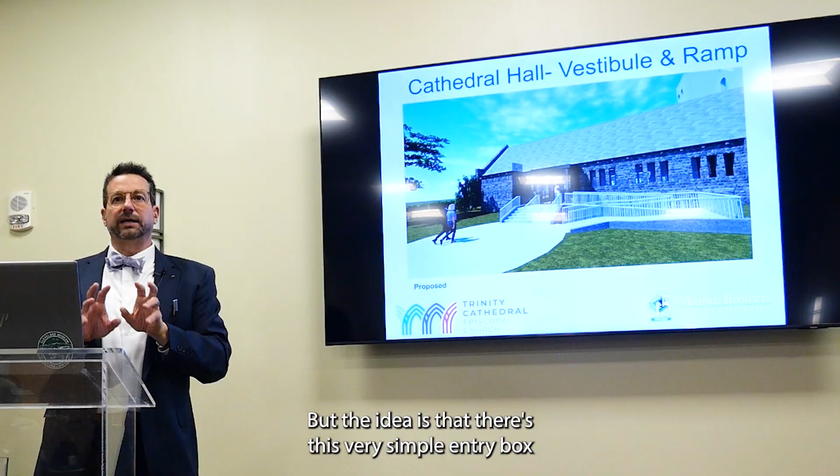And I think this is not quite as transparent as it would actually look. There would be more light inside, you're able to see through. And we don't know what the final colors will be. But the idea is that there's this very simple entry box that's deferential to the architecture around it, but provides that transition.

And also, when you go through this portal, you see that as an entry, and it directs you where to go. So really emphasizing that connection. Is the portal in the... I'm sorry, this may just be perspective of that rendering.

Is the portal in the exact same place where the current misplaced interior door is? Yes. So this is where that interior door is from the Briggs mansion, so we would use the same opening. Got it, thank you. It's there. Yep.

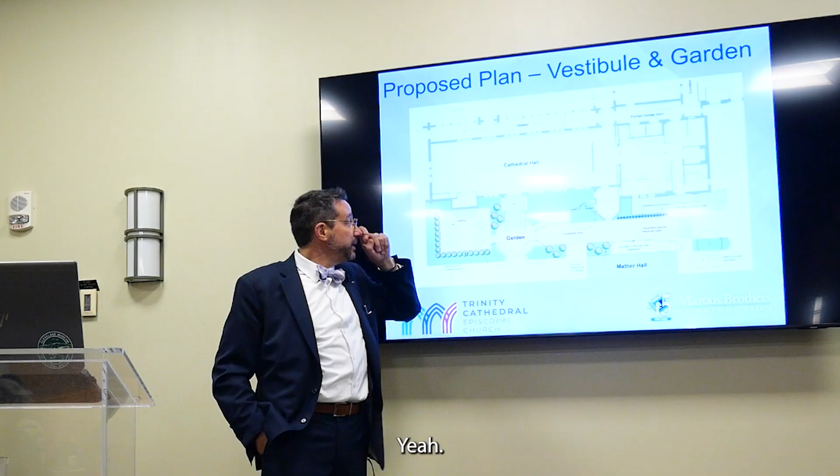And also, you may not be able to see it from where you're sitting, but you would be able to see the wood framing in there, so it has that warmth of material. It's a historically compatible addition. You never want to take away from the historic architecture, you want to be sympathetic to it. And this does that by differentiating the old from the new, but still being able to be transparent and understand and appreciate the architecture behind it.

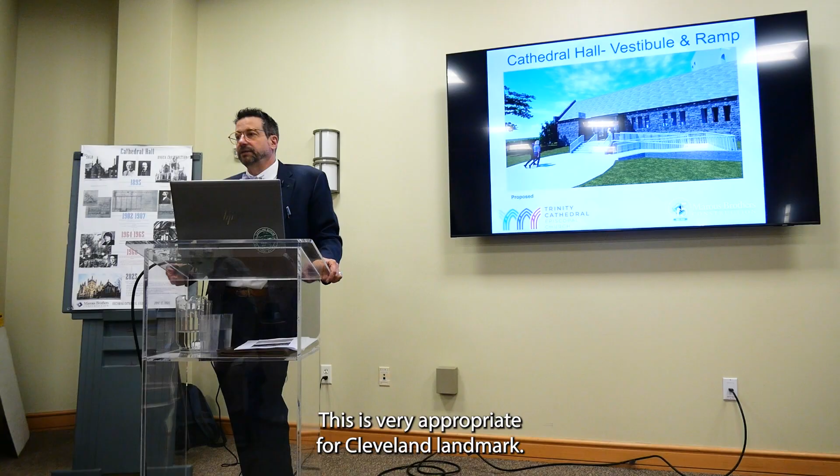And I will just say as an aside, anything we do on the exterior is going to go to the Landmarks Commission. This is very appropriate for a Cleveland landmark, and as a former member of the Landmarks Commission, I can tell you they're going to be very scrupulous about what they allow. I think this is something that they would very much support, but we'll be very mindful of that.

Yes, your rendering is very devoid of trees. I'm just wondering if the presumption is that some of those old oaks would be gone. Let's talk about that. I said the rendering appears to be very devoid of trees, and I'm just wondering if the presumption is that some of the old trees will be gone.

So we're going to add, we just haven't added a lot of the greenery to the rendering yet. We don't want to chop down all the trees, just to be clear. I will say some of the sycamores that are out there look like they're in pretty bad shape, and we've recommended getting an arborist out to look at those.

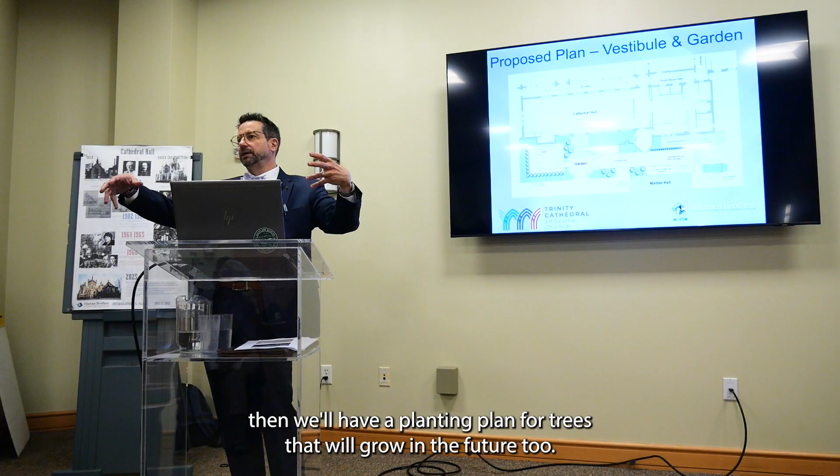We want to have a tree preservation plan, and we want to design around the trees we think are keepable, because you don't just get a 40-inch diameter oak tree off the shelf. There are a few close to the chapel that would need to come down because we're concerned roots will impact your masonry if they haven't already. But once we figure out what trees are staying and what need to go, we'll have a planting plan for trees that will grow in the future, plus perennials and everything else.

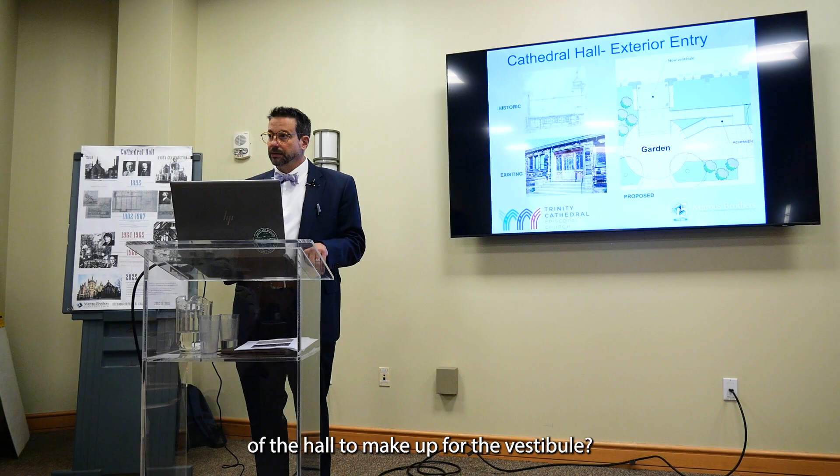The vestibule, the proposed vestibule, how much footprint - are you gaining enough footprint by reducing the size of the stage at the other end of the hall to make up for the vestibule? Yeah, so the vestibule is all on the outside, so it's not taking any footprint inside Cathedral Hall. At all? Right. Okay. You're utilizing the same door opening that the garden door is in now, and we're just building to the outside.

Off the cloister, I'm sorry. It's a pretty close offset. I don't know exactly, but it's very close. Okay, yeah.

Just a quick question about the kitchen area. Are you looking at replacing the walk-in refrigeration unit? Yes, that would be part of this. Those tend to be built in place. Let me see if I have a good - where am I? This will do. So right now you have the walk-in cooler and then the walk-in freezer is off of that, and they back up against this wall, which in laying out the kitchen is just sort of the worst possible place for them.

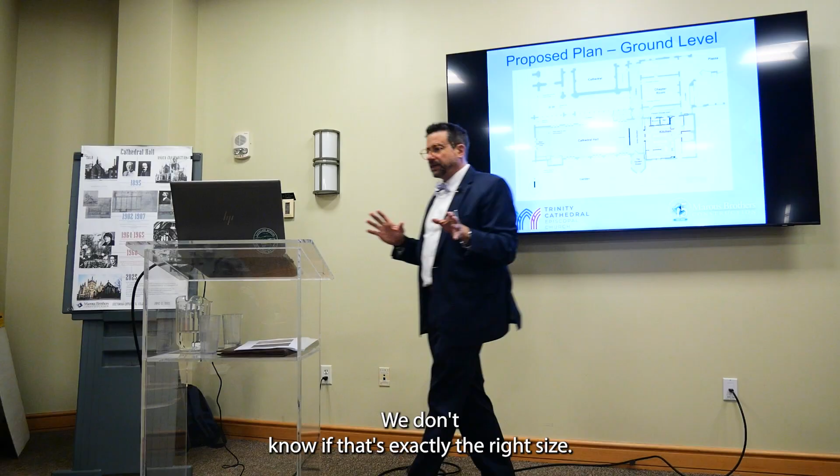And figuring out right now, we're showing this is the walk-in cooler. We don't know if that's exactly the right size. It could be that one thing with walk-in coolers is there's a walking path in there, so you're building and cooling a space that isn't doing anything, right? So it may be that we can go to one or two reach-in coolers. That's all going to depend on learning more about the quantity of food volume that goes through.

Carter, I think the prior question about the vestibule might have been directed towards the pre-function space, the narthex. So where that wall comes down from the bathroom box, you're kind of separating that space, not completely, but giving it another use. But that space that's separated now is more than gained when we take the lower level stage away at the other end of the hall. Yeah. Is that what you were referring to, Evie? Yeah, and I don't know exactly what that offset is, but yeah.

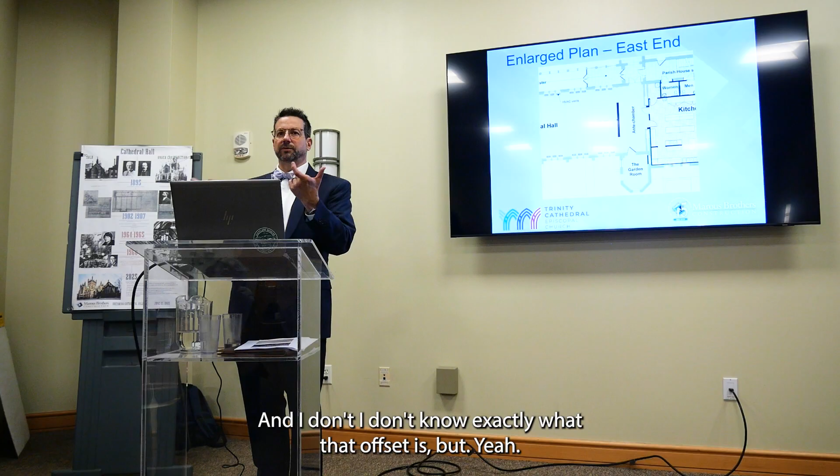What can we currently fit in round tables seating today? We have 132 on the... new one, I don't know exactly. Does anyone? 15 rounds? So times 6. Mm-hmm, yeah, you could. We put 6 at these, you could put 8 at these tables. So, yeah.

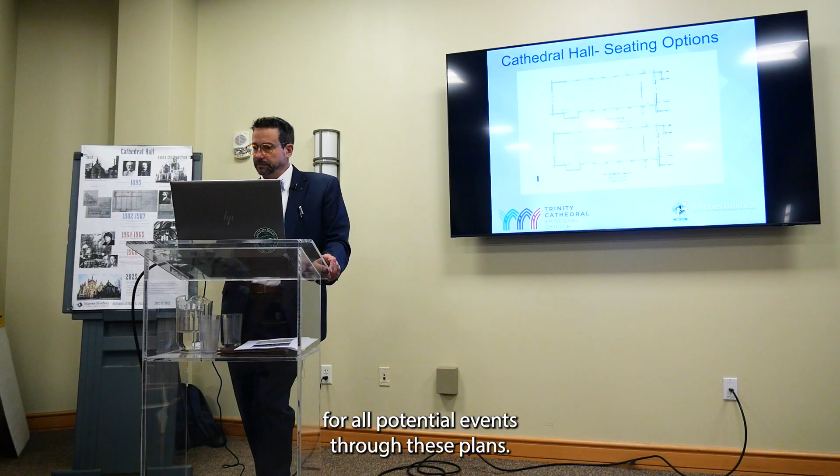So there's 19 tables shown here. I believe that we're actually seeing increased capacity for all potential events through these plans. That's why we made them go through. Thank you. All these different configurations, and there have been a lot of them, kind of dizzying.

I also want to give a shout out to Dave Miano, who has been a yeoman of ushering and translating our concerns to this team, and just his level of detail and understanding about how we move through the space and how we're considering it. So thank you, Dave.

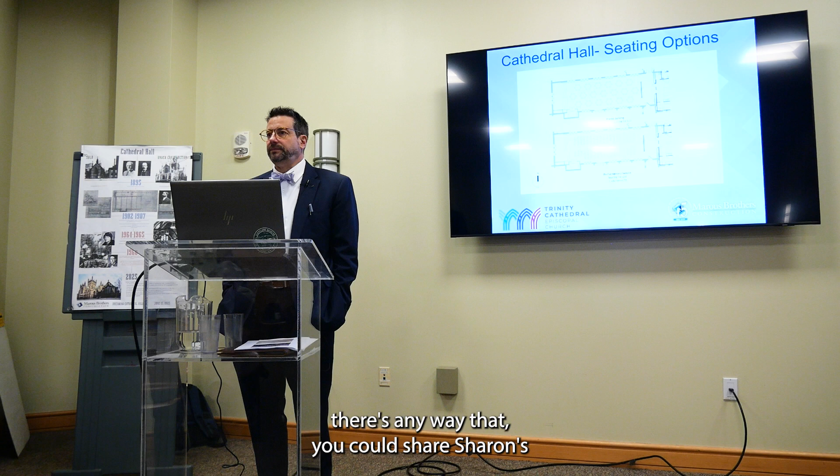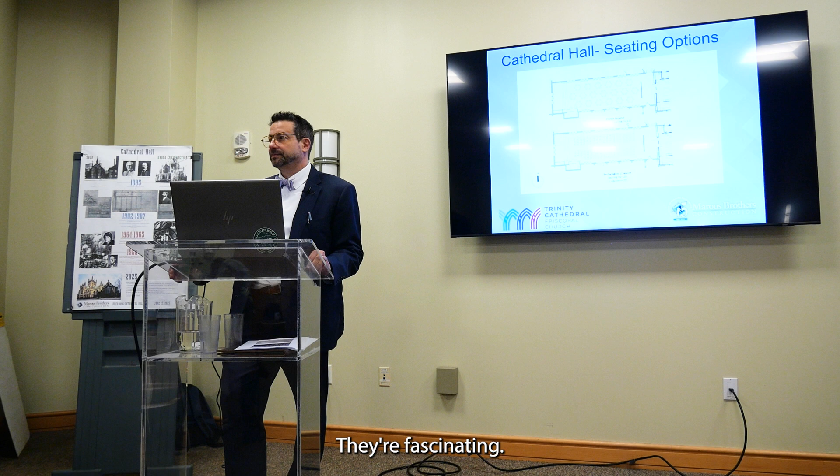I'm wondering if there's any way that you could share Sharon's historical information with us in some kind of format that we could make available to the congregation, because it's fascinating history. Thank you so much. You actually already have it. I've just read the books that John has provided. So I've digitized 2 of them, and I've sent links to Cynthia, and I think there should be a Trinity Summer Reading Club, honestly. But there's 3 books, and I've got 2 digitized. I'm working on the 3rd. Eventually, I'd love to get all 3 of them. Thank you, they're fascinating. And we're going to do another forum.

Sharon. I'm going to geek out with the docents, and everyone's going to know everything.

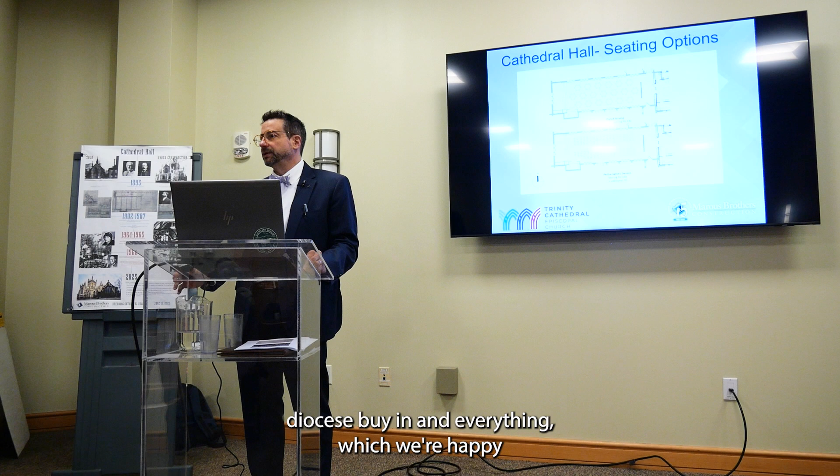So what's next? Well, we would love to move into design development and construction drawings and do this. And I know that really depends on fundraising and getting everyone on board and all the other things, and getting the diocese buy-in and everything, which we're happy to help with in whatever capacity. But there's this - we've identified a discrete standalone project here, which we could execute. But there's a lot of other things to consider in the campus as a whole. We alluded to Mather Hall and so forth. I guess the answer to your question is, it's not exactly for me to answer. It's for you all to answer.

I can give a little bit more of a response to that. This has been the culmination of one of many steps as we've discerned what projects and needs are in front of us, part of a larger conversation around everything from windows to endowment to some other less major initiatives. Now there are two tracks for us as a cathedral. One is for our capital campaign team, which has been meeting for 6 or 8 months, just beginning to take this information along with other threads and pull them together to present a case, a rationale, and a sense of our overall scope. That also includes feasibility work we're doing, financial feasibility work.